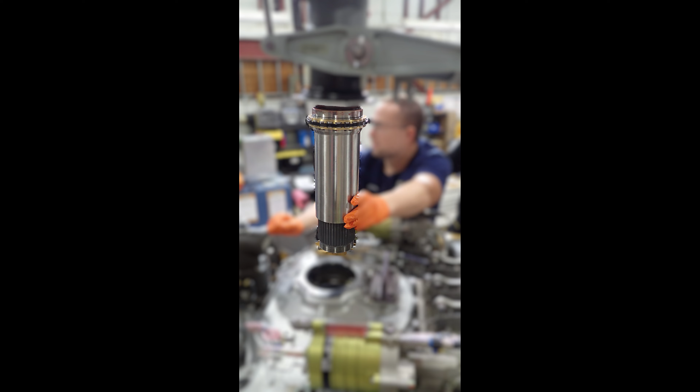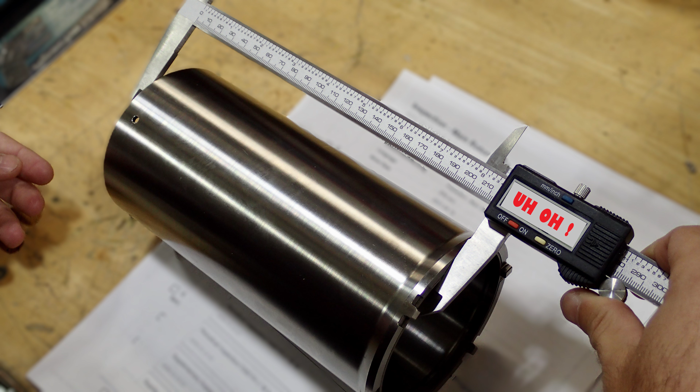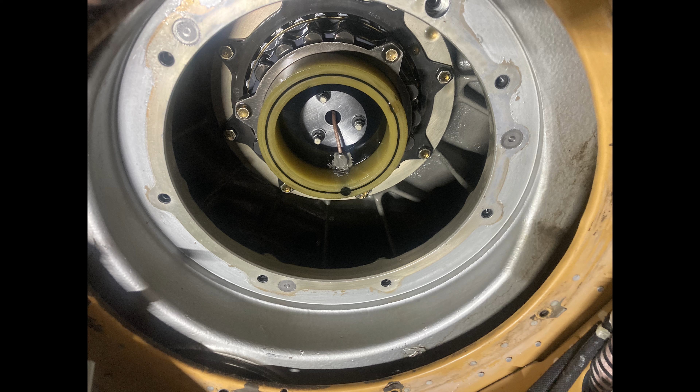This is the second video in a series of three videos. The main purpose of these videos is the spacer tube inspection. The first video is removing the mast. This second video is inspecting the spacer tube, and if you need to disassemble the mast to replace the spacer tube, we'll go through that, and then reassembling the mast. The third video in this series will be on a playlist, spacer tube inspection, and will cover reinstalling the mast.

So this video right here, we're going to do a detailed inspection of the spacer tube.

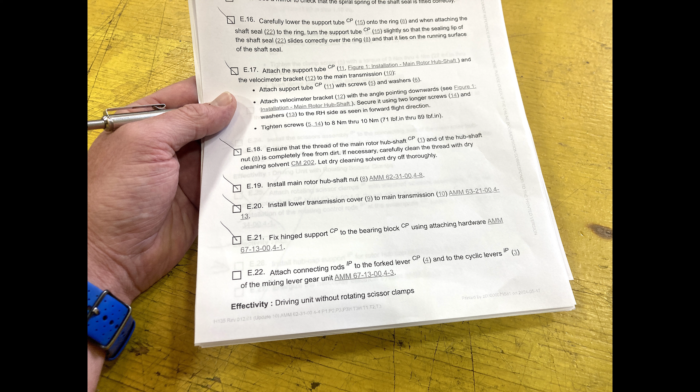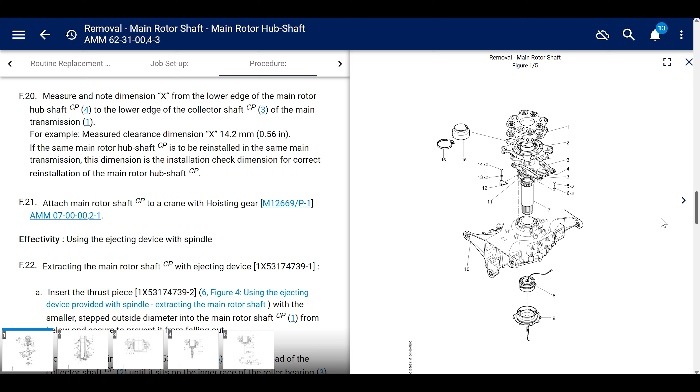I'm going to say this again, I said it in the last video: make sure you read the manual. We're going to go through about three, four, five, or six different sections of the maintenance manual. I'm not going to pull each one up and read word for word on each part we go over, but I'm going to point out some things you're going to need to look at, and I'm definitely going to go over almost line by line for the inspection, along with some things people miss and my personal thoughts.

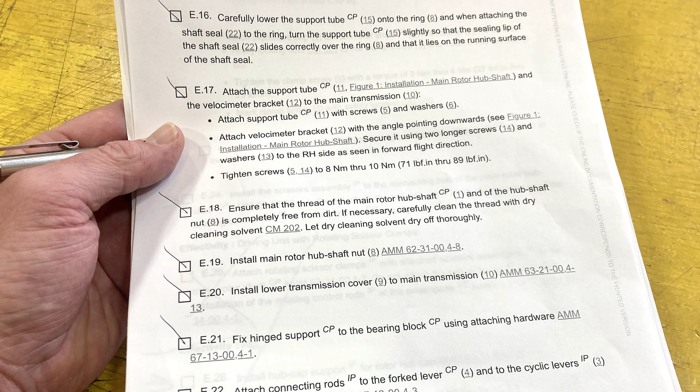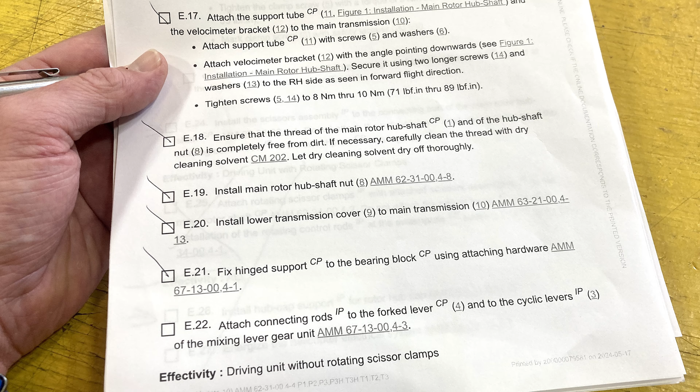Just read the manual, okay? Print it out. And the newest revisions of the manual so far have little squares on the left side. So once you're done with that part that they tell you to do, check the dimension or measurement they tell you to look at. Does it pass? Check it off so you know you've done it, because this whole job, to pull the mast out, do the inspection, and put it back in, is going to take a while, and you're going to have more than one guy working with you. So you want to make sure certain jobs get done and things don't get overlooked.

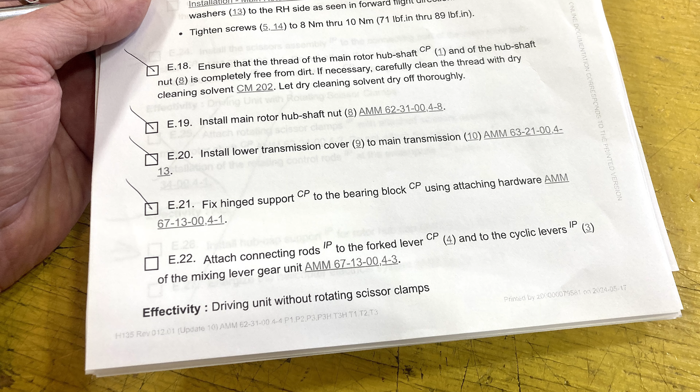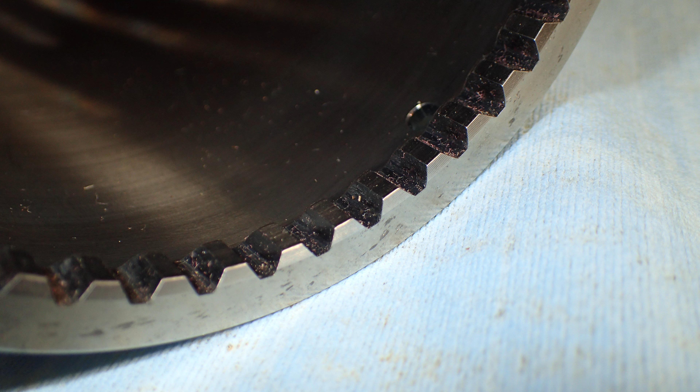Okay, so if you have the mast out and it's sitting upside down, and if the spacer tube is still on the mast and you can't pull it out easily off the inner race of the bearing, that's because the inner race eventually rotates. It's not a press fit, it's a temperature differential fit. So when you put it together, you heat up the bearing and push it down onto the mast, and when it cools, it's stuck on there pretty tight. It shouldn't rotate in theory, but in practice it eventually spins on the mast over time, and puts pressure on the teeth of the spacer tube. The lower part of the spacer tube has splines, so it's attached to the mast. You understand? It's not supposed to move.

So that's part of the inspection, to look at the wear of the teeth on the top of the spacer tube. So if you can't pull it out, that means it's under pressure.

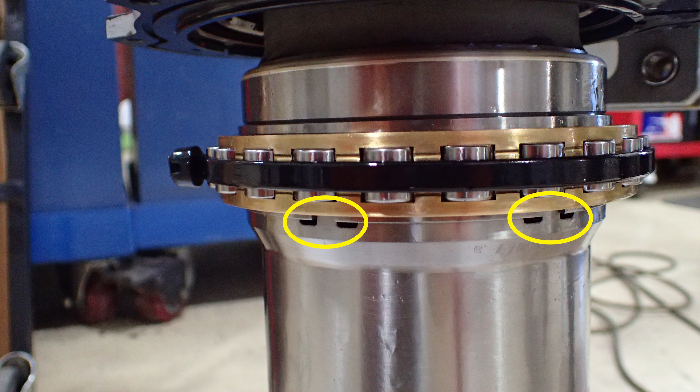Under pressure. Under pressure. And that means you're going to have to wiggle it around and give it a couple taps with a little rubber mallet. Give it a little tappy. Tap, tap, taparoo.

A couple taps with a little rubber mallet to get it loose. And if you have to do that, it's not going to go back on. It doesn't matter, it's not going to go back on, you're not going to pound it back on. It'll wreck the teeth even more. So at that time you will have to disassemble the mast, and we're going to go through that.

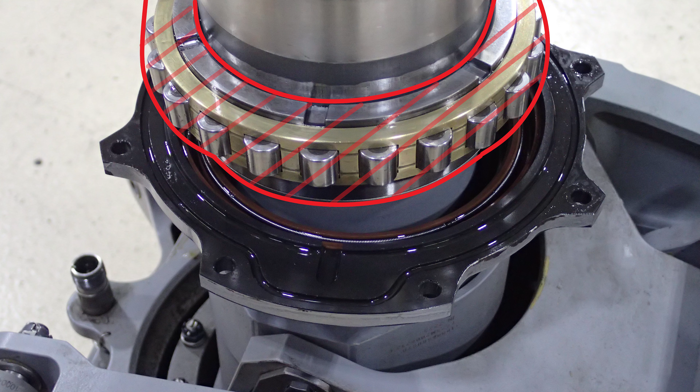Okay, let's just start this inspection. I know we're probably five minutes in of me talking. So what do they want you to do? They want you to clean the mast, using the cleaner they call out.

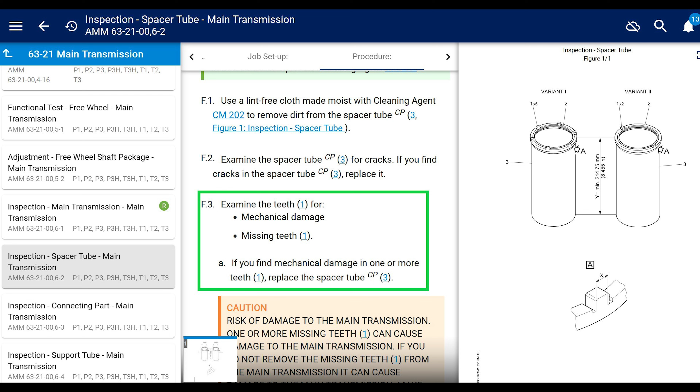Okay, clean it. Examine the spacer tube for cracks. Obviously, if you find cracks, you need to get a new one. It says examine the teeth for mechanical damage or missing teeth. If you find mechanical damage in one or more teeth, replace the tube. Well, we're looking for wear, so they're not calling the wear mechanical damage, which is strange. I guess it's a translation error.

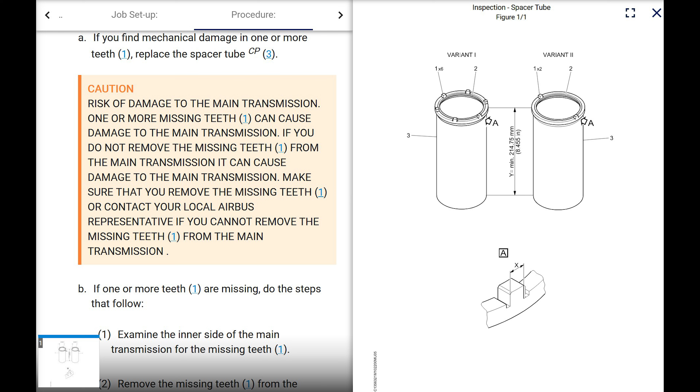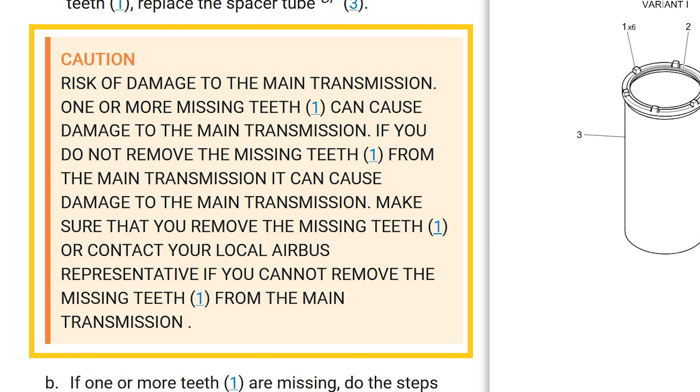But then it says it has a huge caution, and it's all bold. It says if one or more teeth are missing, do the following steps. It says if a tooth is broken off, I've never seen that, you need to make sure you find it inside the transmission, which is sucky. It says risk of damage to the transmission - one or more missing teeth can cause damage to the transmission. If you do not remove the teeth, you can damage the transmission. It says make sure that you remove the missing teeth, or contact your local tech rep if you cannot remove the missing teeth from the transmission.

Like I said, I've never seen a tooth broken off, and I've probably done a dozen of these, which is, I guess, a decent amount, but it's not like I'm doing this every day. You know what I'm saying?

All right, next. It says do an inspection of the teeth on the end face of the spacer tube for wear as follows. This is dimension X. Measure the width, dimension X, which is the tooth. To figure out which one has the most wear, that will be the smallest tooth. Check all of them - don't do an average, just check the smallest one.

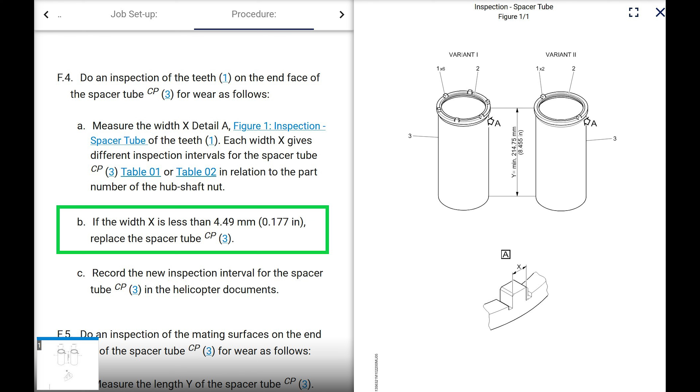And then it says if the width of the smallest tooth is less than 4.49 millimeters, you need to replace the spacer tube. Well, it depends. Hold on, go to the chart. The chart says it depends on which mast nut or hub shaft nut you have.

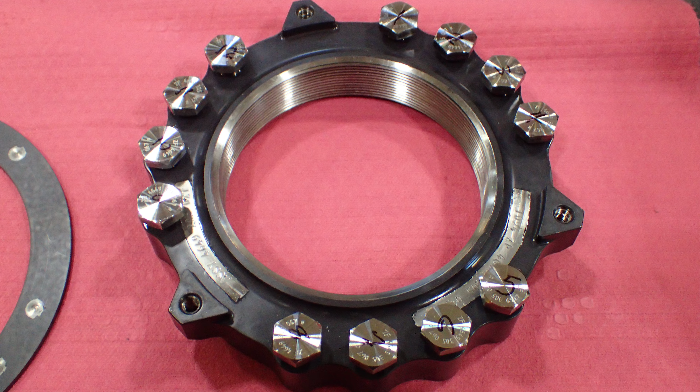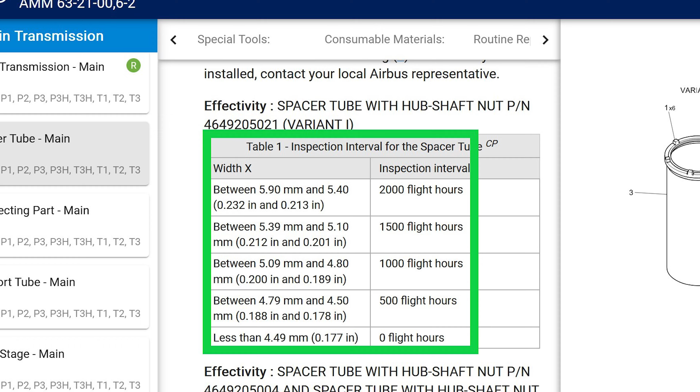We have the new style, which is variant 1. The new style has the thrust bolts, and that's what I'm pretty sure all of our machines have. And if you are operating a transmission that has the new style mast nut, it allows you more time between spacer tube inspections. The interval for a brand new spacer tube is 2,000 flight hours. If you have the old style mast nut, it's 1,600 hours.

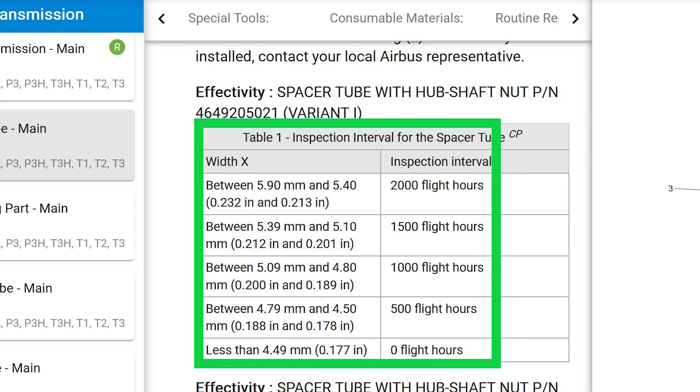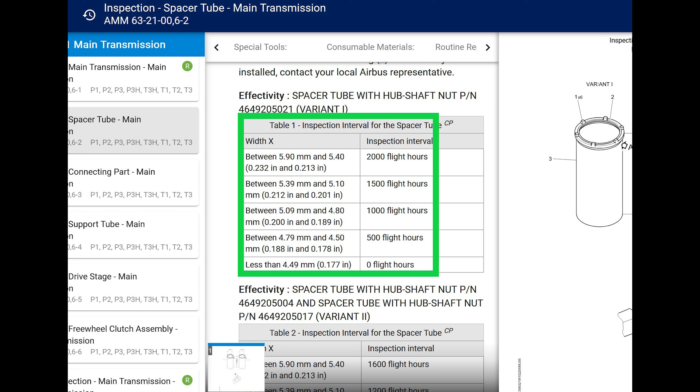So anyway, you go to this chart, or this table, and if you have anything that is 4.5 millimeters or larger, you're allowed to reuse the spacer tube, as long as all the other inspections we're going to go over here all pass. The next inspection interval, the smallest one, is 500 flight hours.

So if it's worn out and it's 4.50 millimeters, put it back in, dude. These things are expensive - they're like unobtainium expensive, man. We'll go over that later. All right, cool. So if that passes or fails - if it fails, you're done with the inspection. Get a new one. All right, next.

On my maintenance manual I'm reading right now, it's F5. Do an inspection of the mating surfaces on the end faces of the spacer tube for wear as follows. This is dimension Y, it's just the length of it. It says if Y is less than 214.75 millimeters, which is 8.455 inches, replace the spacer tube.

So you're going to check it between all 5 of the teeth for the smallest number. And if you get anything that is below 214.75 millimeters, then you're going to need to replace the spacer tube.

And in my experience, if you have the new style mast nut, then your spacer tube will fail this dimension. I don't want to say almost every time, but every one I've done recently failed this check. The teeth will have wear on them, but they won't be as worn out as with the old style mast nut or hub shaft nut. Let me say that one more time in a different way: before, with the old style mast nuts, the teeth would be worn out and it would fail the spacer tube check, and we wouldn't even check dimension Y - that might have also failed. So I don't know if it's a new problem.

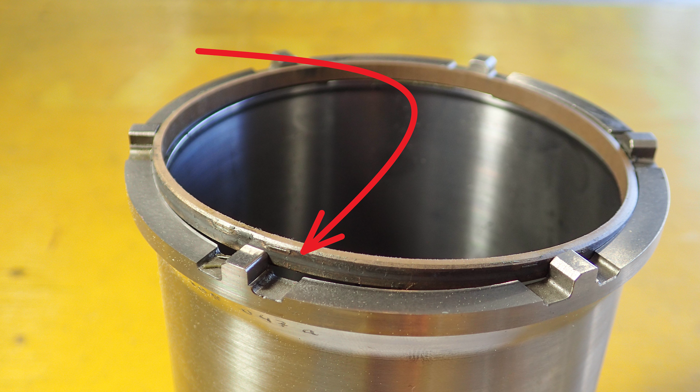I think before it said it was trash. Either that, or the people I talked to at Airbus said you cannot rebond that seal onto there, but I think maybe you can now. Like I said, pretty much everyone I've checked in the last 2 years has failed the Y dimension, and half of them also had the seal messed up. But we're not going to glue the seal back on because the spacer tube's already trashed, since it failed the other check.

That makes sense. Wow, that was easy. That's the end - not really the end of this video, just the end of the inspection. Next step: close up, install the spacer tube, go to the installation section. All right, great.

If your spacer tube passes, you can just hand jam that back onto there, of course make it fit. It won't line up - you have to try all 5. You've got to keep rotating it to make sure the spline lines up and the teeth line up, and then you go install it.

So it could be easy, but most of the ones I've seen have failed because it's been flying for 2,000 hours. That's a long time, right?

Okay, so next we're going to go over partially disassembling the mast so we can install a new spacer tube, and the kind of problems you might run into doing this job. Like I said before, if the spacer tube will not freely come off of the mast, and you have to give it a couple taps, it's not going to go back on.

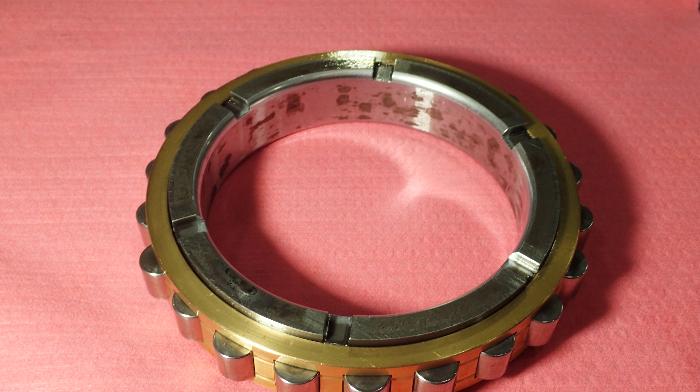You're going to have to pull the bearing, which is connected to the bearing inner race - so that's one piece. Right above that - well, if it's upside down, it's below that - but on the aircraft, right above that is the ring, which is the ring that the upper mast seal seals against. So anyway, you're going to pull off the ring and the bearing together.

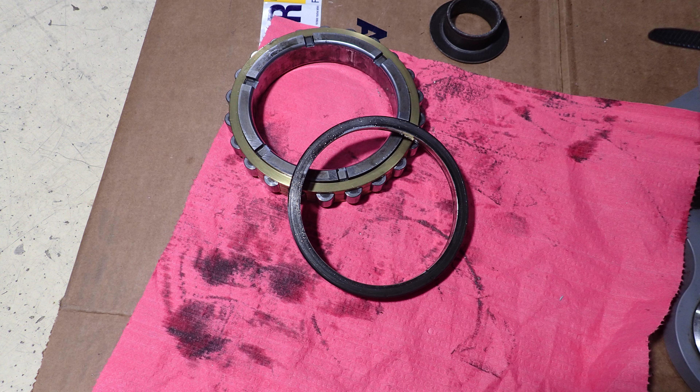Then you're going to put them all back on together. You're going to put the ring on, and then you're going to put the spacer tube - the new spacer tube - with your bearing onto the mast at the same time, so that the splines line up and the teeth line up with the inner ring. I know that's a lot of words, but we're going to go over that step by step.

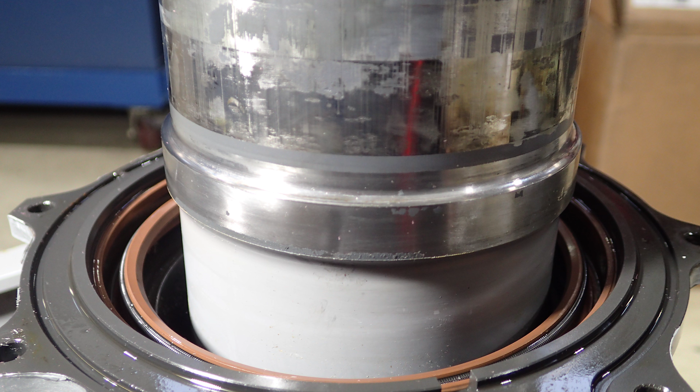Okay, in this picture the mast is right side up. You would have it on the ground, upside down, but I'm just using this picture to look at. Do you see above the ring is a ridge? The mast is a little bit wider there, so it has like a ledge or an edge. So when the ring goes onto the mast, it butts up against it - it can only go in one spot, and it has to go all the way against it.

So before you do anything, clean that up real good, and then maybe mark a circle with a marker there - a couple lines or whatever, a couple spots - so that when you go back together with it, you know it's all the way down. You don't have to do that, because if you do this job correctly, it will be good.

But if you're off by, say, a couple millimeters, and you go all the way back to put this in the helicopter, check your final measurement, and it's off, you've got to do all this again - you're going to be pissed. So anyway, I'll show you how you can get this screwed up down the road on the assembly part. But mark a line all the way around it, or mark a couple marks, so you know that ring is all the way seated against that ridge on the mast.

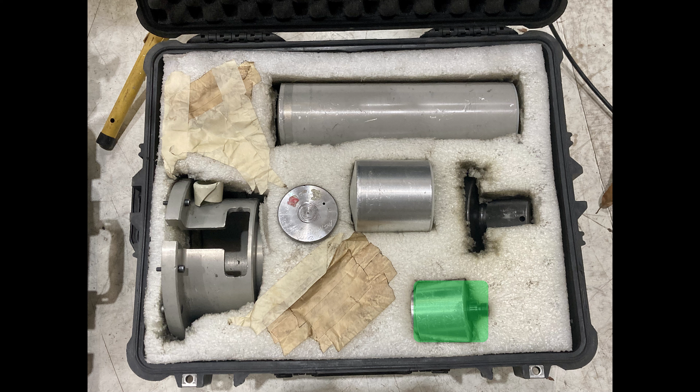Okay, let's pull this mast apart. You're going to need this tool right here on the bottom right - I don't know what it's called, but it's in the manual. All this is in the manual. You're going to need this part, which is the puller, and it has the big arms.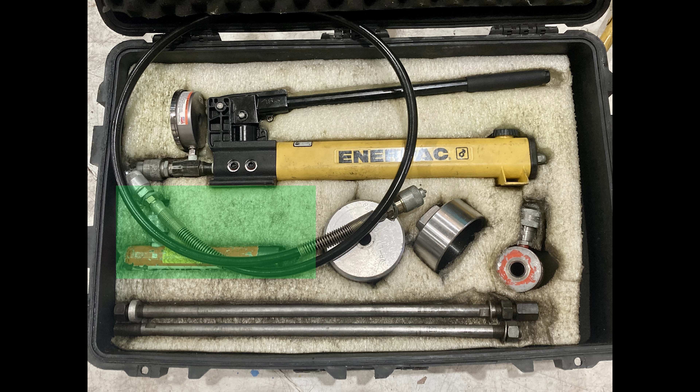It's got clamps against your ring - you're going to need that. You're going to need this little hydraulic press, and also the hydraulic pump. What else? Okay, that's it.

Because I never take enough pictures, it just seems to be that way. That's why this video has taken me a very long time to make. Honestly, it's taken like a year. I've done this job like 3 times to get enough videos or pictures to make this video. Anyway, cry me a river, right?

So right here, the swash plate support has the upper mast seal inside of it. If you needed to do that job, that's where it is. So you would do this disassembly here, just pull, and then you would pull that swash plate support out and change that seal. And here's a side note: when you do it and use the tool, since that seal is so wide, it almost never goes in straight.

So you have to, before you take it out, check to see how deep it is all the way around. And when you go back in, just make sure it's level. Because if you just press it in and don't double check to make sure it's equal all the way around, it's not going to seal, and it's going to leak oil all day long, and you're going to do all of this again.

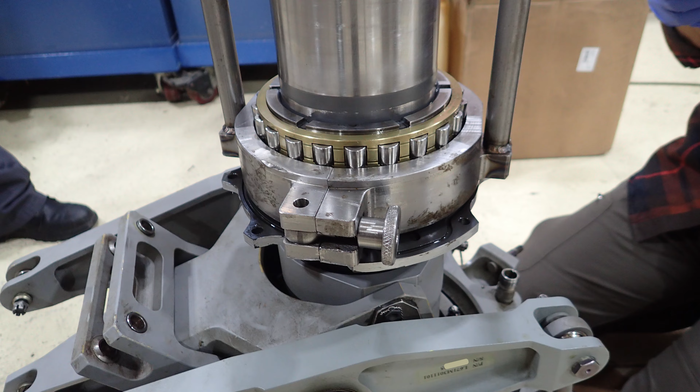Okay, we're pulling this thing apart now. We got that big old thing with the long arms and the clamp. We're going to clamp it underneath the ring. Oh, okay, I'm sorry, back up. The swash plate support, you have to push it down a little bit so you have enough room for the clamp piece with the arms to clamp underneath the ring.

Because you can't just pull the bearing off, you'll wreck it. Look at it, it's made out of brass. And also look at it and see if it's all bent up, because I've seen that too.

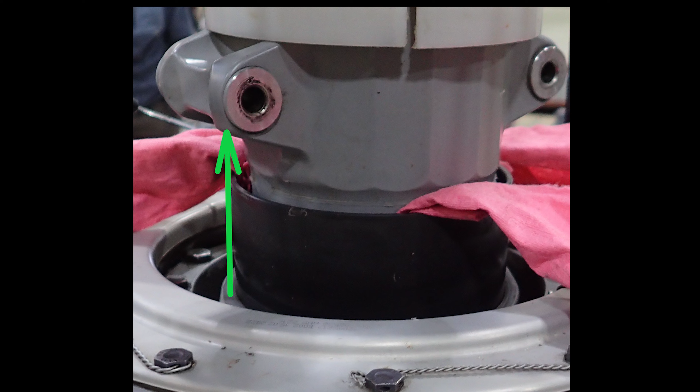So push the swash plate support down a little bit if you can. Don't get crazy, because it's gonna hit the bottom of where the drive links connect. It will contact there, so don't jam it down there. Just nice and easy, make sure you have enough room. There's not much room. Put this tool on there.

So put the tool on there, make sure it's grabbing under the ring. And make sure all those bearings are pushed in, because sometimes they pop out a little bit.

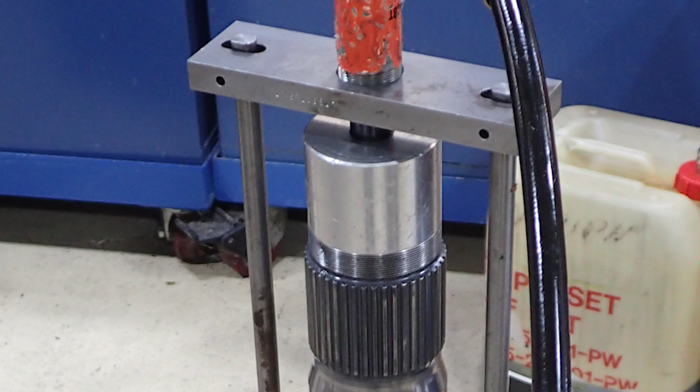Cool, now we hook up that one round, or cylindrical, piece on the top. It fits into the inside of the mast, just slides in, and then it actually threads into that red hydraulic ram piece. You have it all assembled.

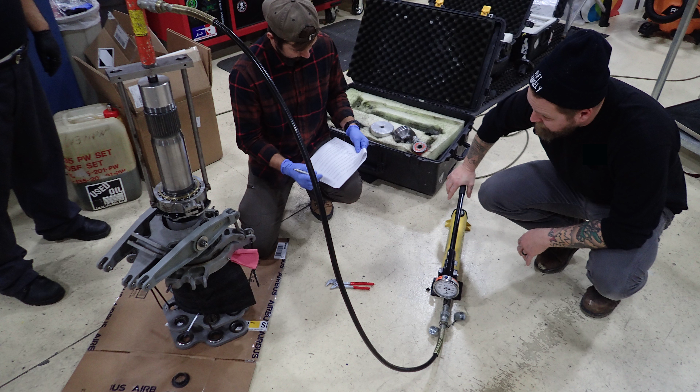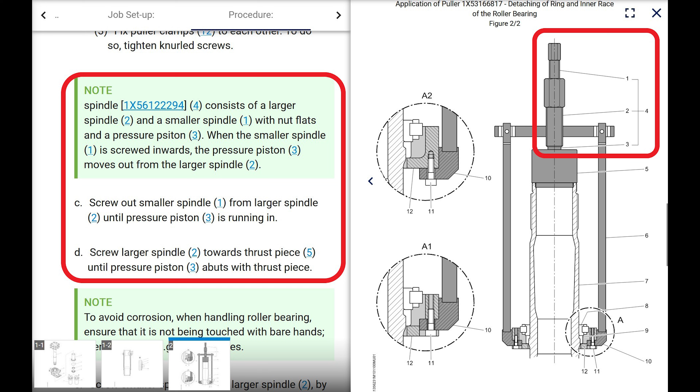Now you start pumping it up. I'm going to see what the manual says, if there's a maximum. No, there's no warnings in the manual about how much to pump it up. They actually talk about using a different style tool, which is like a big bolt inside of a hollow ram, and it's just filled with oil. So it's an old school hydraulic type pump. It's not like this one.

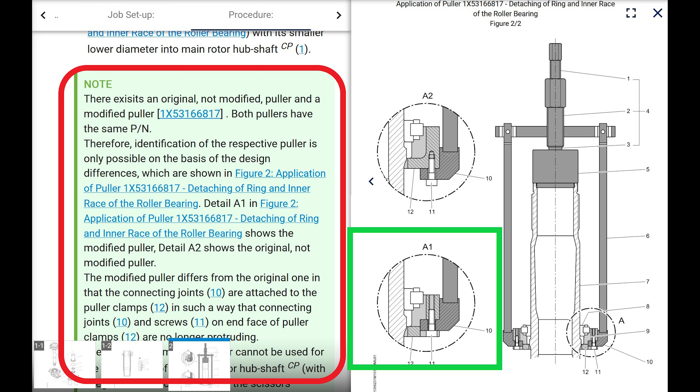But there is a note saying that there's an old tool, like the clampy piece—an old style and a new style. Anyway, it has warnings, it has pictures. Read them. Go to the manual and read it. Where are we now? We are at AMM, Aircraft Maintenance Manual 62310004-5.

Okay, there is a note. I said this in my last video: don't touch any of this stuff with your bare hands, okay? Wear gloves. It says that right here, to avoid corrosion. I'm not going to beat that horse to death. I think we all get that, right?

I have seen guys pumping this thing up, and it's crazy pressure. Crazy pressure, I don't know, man. Let's just say I don't know, I'm not even going to say a number. Just tons of pressure. And it won't come off, it won't pull it off. What do you do? Well, you have a couple options.

First, take all the pressure off. Undo the... I got to figure out what it's called before I keep calling it clampy piece. It's called a puller clamp. So remove the puller clamp, loosen it up, take all the pressure off, and then rotate it. Maybe take the arms off, turn it 180 or 90 degrees, clamp it back up again, and then try pumping it again. I've heard guys doing that, and then it came off like it's supposed to with way less pressure than they were at.

If that still doesn't work, you could probably heat it up. But if you do that, you're also heating the mast up because it's touching it. So I don't know, that's going to be a tough one. But I've only heard of that a couple times.

Okay, back to this, back to the maintenance manual. Just pump it up, then it comes off. The ring with the bearing comes off at the same time. It's up past a wider area - you see where the gray spot is right there? It's wider than where the shiny spot is. So once it goes past the gray part, the whole thing's loose. Make sure someone's there next to the whole contraption so it doesn't fall over. But then you could undo it, undo the clamping fixture, puller clamp, whatever it's called, and then take off the bearing and the ring. Cool, done. What do we do next?

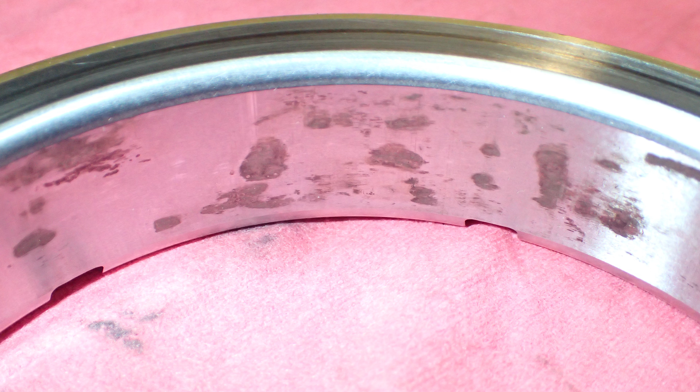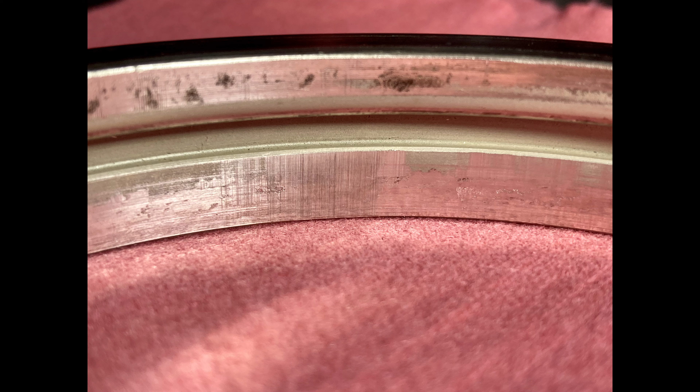Well, for this particular job, bad news for us. The inside of the inner race of the bearing had pitting and corrosion. So that's bad. Also, the ring had pitting and corrosion, and the silver plating, I think it's called silver plating, was all, most of it, flaked off. It came off when we pulled it off, it was all just a bunch of flakes. It was wild.

Looking at the inspection, which I'm not looking at right now, but if my memory serves me correctly, the fact that the silver plating was gone from the inside of that ring meant you needed a new one. But also there was pitting and corrosion, and Airbus says no, you need a new one.

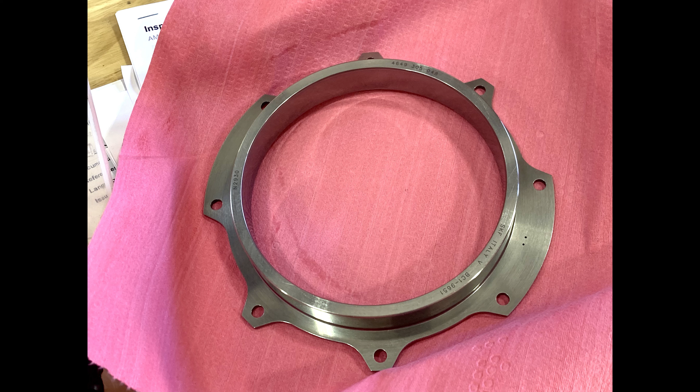No worries. So if you need a new bearing, a new mast bearing, like I said, the inner race and the bearing are attached, but that part right there comes as a matched set with the outer race. So when you get it, it comes together. Don't leave the old race in the top of the transmission - you need to take that race out and replace it, okay?

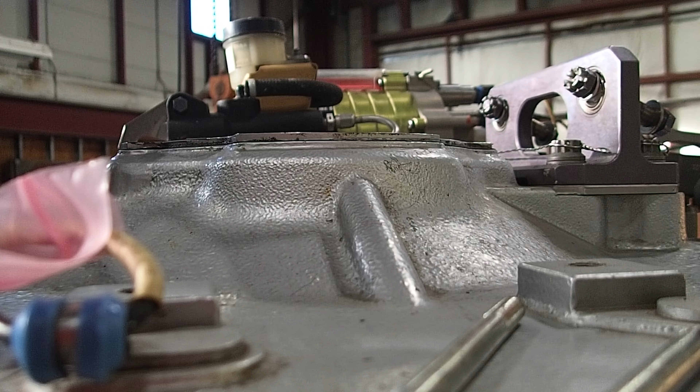It's kind of tricky to do, but go to that chapter in the manual on how to replace that and do it right, okay? Here's a quick video of it getting removed, and then a quick video of me trying to put it back in, and it took a long time, and we followed the manual. We heated up the transmission to a certain temperature, whatever it says, and it has to go precisely in. If it gets cocked sideways at all, then it gets stuck.

Crazy, anyway. Okay, great, that's it for the removal, because that's as far as we're going to disassemble this mast. We're not going to take off the swash plate, and we don't need to take off the support tube. Okay, next we're going to go back, we're going to go to the buildup of this job.

All right, you're going to want to clean it real good. How do they tell you to clean it? What's it say? Doesn't really say. Clean the main rotor hub shaft and renew the layer of varnish on the faying surfaces for the ring and the inner race of the roller bearings. Also the outer splines at the very bottom of the mast. It gives you a reference, 6231008-4. So go there, okay.

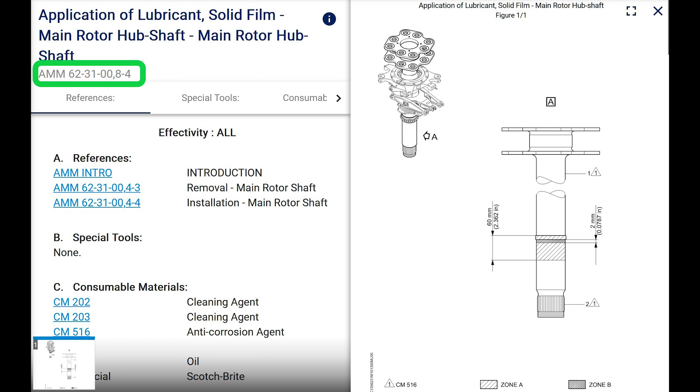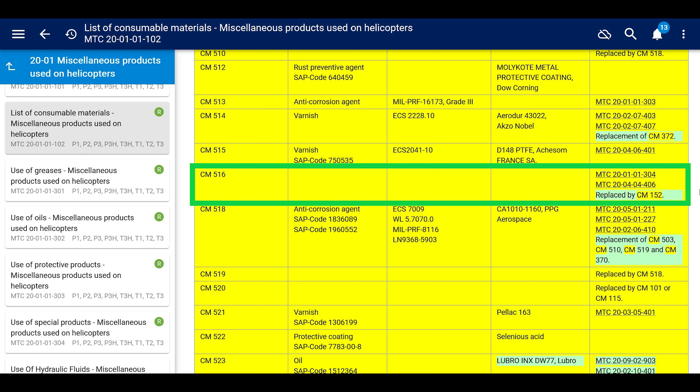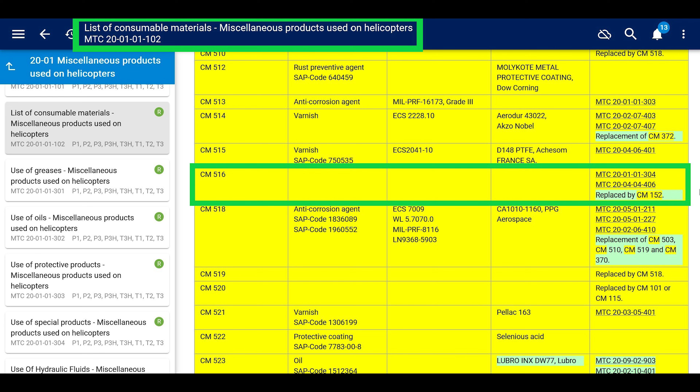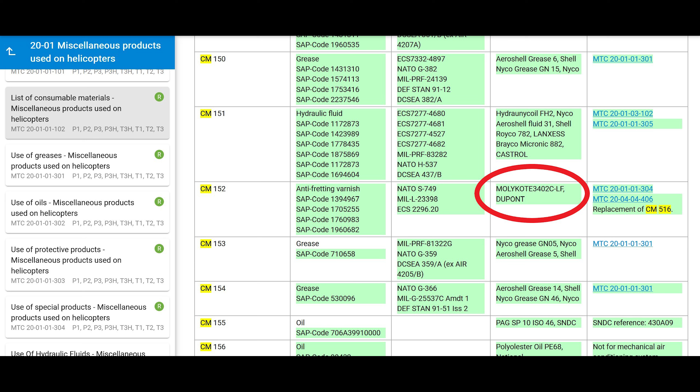All right, what do they want you to do? Or what do you need to do that job? In the manual, they tell you to use consumable CM516. If you click on it, it's blank. So you have to go all the way to the list of consumable materials, which is right here. It's MTC, that's the section MTC 2001010102. Scroll all the way down to find what it is, because that's where the replacement reference now is. Anyway, it says it's replaced by CM152. What is CM152? It is DuPont Molykote 3402 CLF right here.

Great, read the manual, they want you to spray it on. So clean it real good, you got to clean all the old stuff off, spray it on. It can only be a certain thickness.

Just make sure it looks good. Do a good job. All right, now we're going to assemble this thing. What tools do you need?

First thing, you're going to need this long tube. It's a drift. Then you're going to need to heat up.

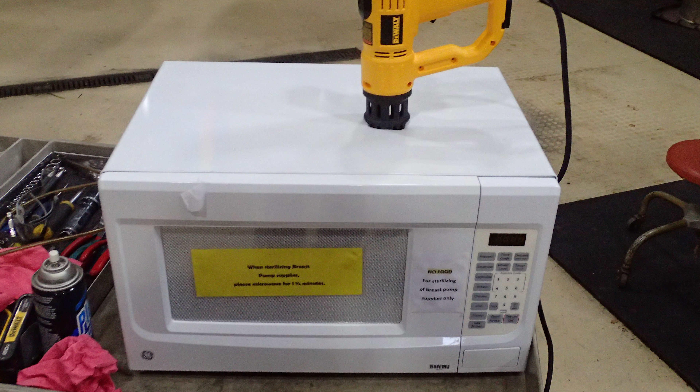Let me just read the manual. All right, it tells you again, there's a note. It says the inner race of the roller bearing and the outer race of the roller bearing belong together as a bearing pair. If you need to replace them, replace them together. And it says AMM

6321008-8. If the roller bearing is replaced, ensure that the roller bearing and spacer tube fit together. See note step 10 regarding pairing for parts.

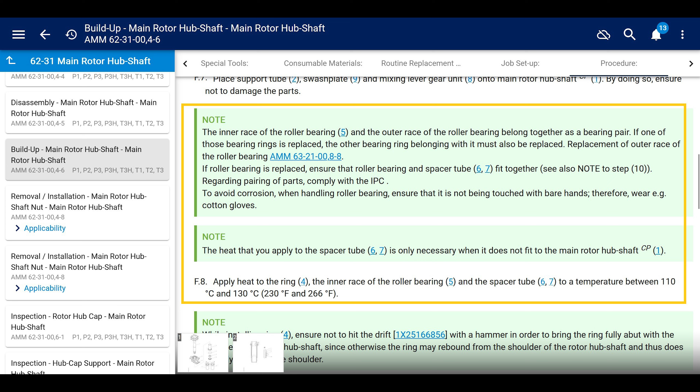All right, here's a note. The heat that you apply to the spacer tube is only necessary when it does not fit to the main rotor hub shaft. So it says apply heat to the ring, inner race of the roller bearing, and to the spacer tube - we just said not necessarily the spacer tube - to a temperature of 110 degrees Celsius to 130 degrees Celsius. That's 230 degrees Fahrenheit to 266 degrees.

That's hot. That's hot. So what did we use here? We used an old microwave that the hospital was throwing out. Apparently this microwave was only to be used to sterilize breast pumps, so that's great.

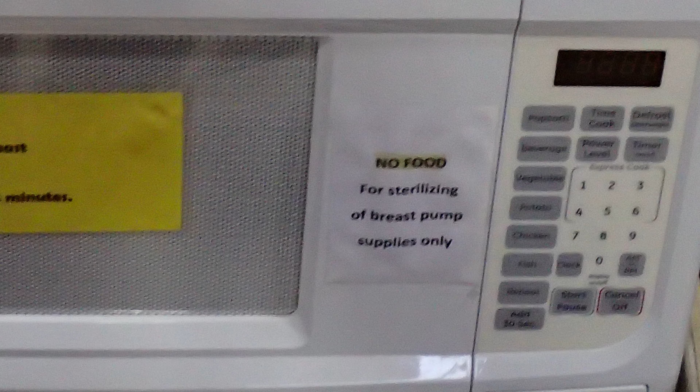Okay, so that's heating up with the heat gun. Make sure you don't heat it to 500 degrees, just make sure it's within the range. Don't overheat that stuff, but also make sure it's hot enough. Get some welding gloves or some really thick gloves, or you're going to burn your hands. For real. Okay, note, this is important.

And since their notes are green, I think in your brain you just don't want to read them. I understand that - not you, but the general you, meaning me, right?

So note, when installing the ring, ensure not to hit the drift with a hammer in order to bring it fully butt against the shoulder of the rotor hub shaft, since otherwise the ring may rebound. What that means is don't hit it, don't hit the drift with a hammer to make it fit. All you do is press it down and hold it there until it cools and shrinks, and then it clamps up against it because it shrinks against it.

If you tap it down, you might tap it and it might bounce off the shoulder while it's cooling, and when it bounces up, it might cool enough where it's a couple millimeters off the shoulder, but since it's cooled enough, it's stuck there now and it won't move - but you think it's all the way down. So don't hit it with a hammer.

In this video I'm going to show you, we did that - of course it didn't go all the way down, and we took it off and it went down correctly. So that's an important note. Otherwise you're gonna figure it out later.

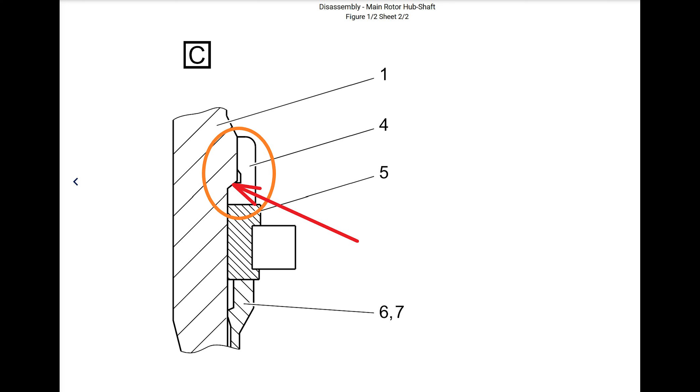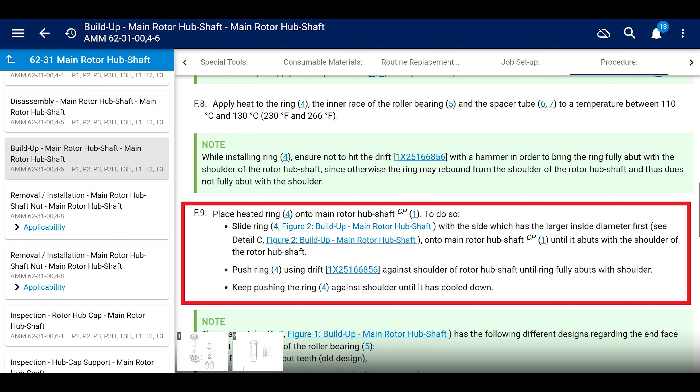Everything won't work. So just grab the ring with your gloves, make sure it's in the correct direction, but it should just drop down. If it's hot enough, it'll just drop all the way down to the shoulder. Then you have another guy come in with the drift and just hold it down for a little while. Then it cools - the heat will transfer to the mast, the ring will shrink and grab it, it will shrink up onto it, okay?

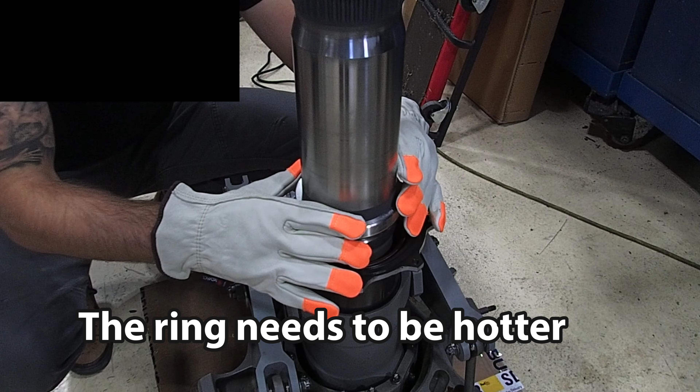When I start pulling that heat on you, you might want to drop her down. Yeah, right there's where it gets tight. So now he could just press it with the thing. Now hold it down, just push your weight on it and let it cool. So he went down pretty slow with that thing, and it cooled too fast, and it didn't go all the way down.

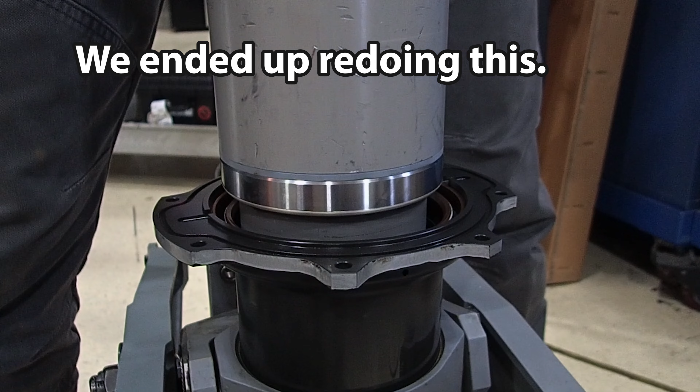Okay, no worries. Okay, now we're going to do the bearing and the spacer tube at the same time. There's also a note here, same as before: don't hit it with a hammer because it will cool down, bounce off the shoulder, and won't be flush against it like it's supposed to. So you have a guy grab the bearing, another guy grab the spacer tube, and you line up the teeth of the spacer tube to the slots on the inside race of the bearing.

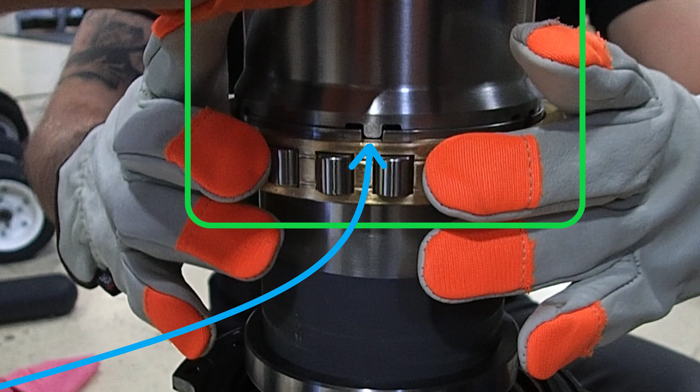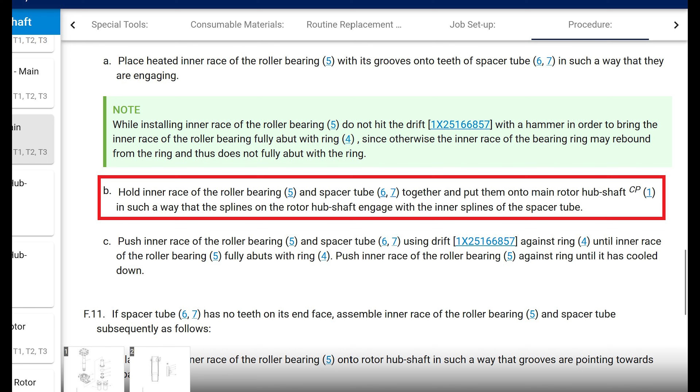You hold them together and put it down together at the same time until you get to the point where the splines in the mast line up with the spline. You might have to rotate that spacer tube and bearing assembly together until the splines line up, and then you can go down all the way. Then either that guy or another guy comes in with a smaller drift and just presses down on it to hold it there until it cools, just like the ring. So that sounds good in theory, so we're going to show how it goes.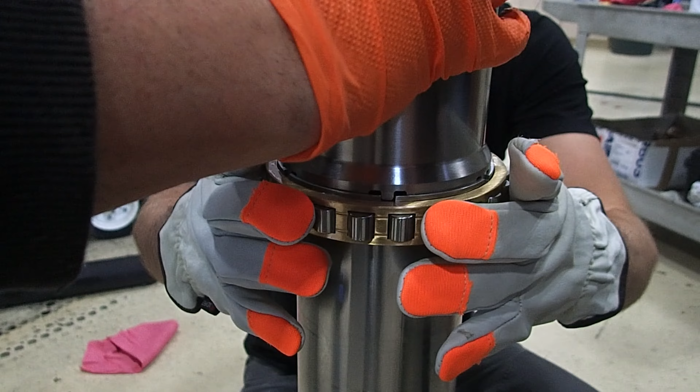Yep, go ahead and go. Push, slow up. They go too slow, or the bearing's not hot enough, or both, and it cools down and it doesn't go all the way down. If you go pretty much most of the way, you have to pull that ring and bearing off again as an assembly. It didn't go down, so they pulled it off and tried again.

Tangs. Let's go, I'll push you. Go, fingers. Just hold it there, bro. Yeah, you're in, just hold her there. Went like butter, see?

If you see how your spacer tube's not centered, that's actually a good thing, because it'll hold that spacer tube on there. If that spacer tube's centered, it wants to slide off when you're up there. So having it off to one side isn't necessarily a bad thing.

Okay, did you see how the bearing just dropped down? Perfect. It just dropped down, and it wasn't even like the guy who was holding the spacer tube was keeping up with him, but it dropped down, and then once the spacer tube splines lined up with the mast, he caught up with it, and it went right in the right spot.

Perfect, so that's good. And then you just hold pressure with the drift until it cools so it doesn't move. Strong work, guys, awesome dude. That's it, that's the job.

The job's done. So you want to double check to see that the ring lines up with the lines that you originally marked, just to make sure it's all the way down. That's a side note, honestly that's it. And make sure that seal is good, and make sure that spring inside of that seal didn't pop out. But that's on the next video.

We're going to do the reinstallation of the mast. But that's it for this video.

So pretty much the highlights are, if you're going to do the spacer tube inspection, you should plan to have a spacer tube on hand if you can. I mean, how much is a spacer tube? I don't know, I think I have it written down. Let me look. Yeah, duh. I have it written right here on a Post-it note on my laptop that's been here for like a year because I've been waiting to make this video. It was...

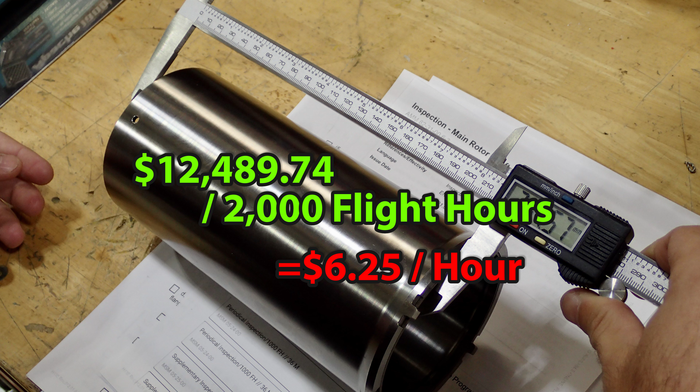$12,489.74. So let's do the math on that. Hold on a sec. Okay, so just the spacer tube, if it fails after 2,000 hours, which I'm pretty sure they all will, that will cost you $6.25 a flight hour, not including shipping and not including maintenance costs.

That's a lot. $6.25 a flight hour that you're going to guarantee have to pay when you operate this helicopter for this part. Just saying, that's why helicopters are expensive. This is one of like 1,000 parts that you're going to replace. So if you're going to do this job, if you can, have an extra spacer tube on hand because it's probably going to fail.

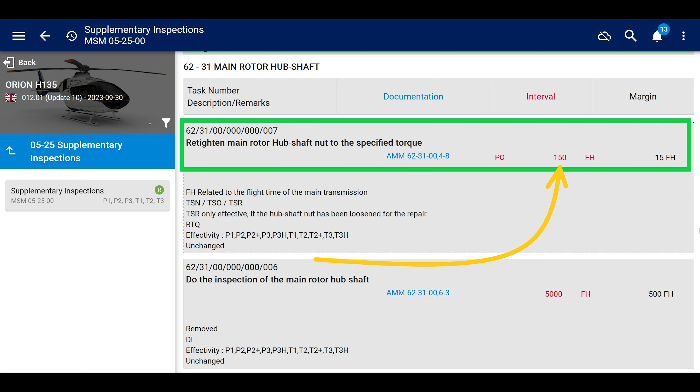What else? You're going to have to do a retorque at 150 hours and 1,000 hours. What else? Don't touch anything with your bare hands.